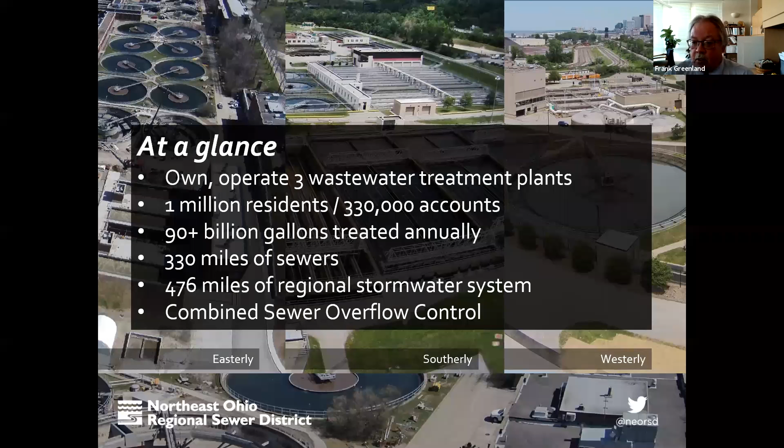So the 3 treatment plants, Easterly, Westerly, Southerly, they treat sewage from 1 million people, 24/7. We've got a certified lab that monitors those treatment plants for compliance with regulations. We pay for all of the delivery of sewage and treatment of sewage through sewer fees.

Project Clean Lake is a large $3 billion program. We're right smack in the middle of it. That program is to deal with overflows from what's called combined sewer systems. These are the oldest systems in Cleveland and the nation. They're called combined because wastewater and stormwater are in one pipe. They do overflow in big rain events. That's a problem, and we're dealing with it. Sewer fees are used to pay for that program.

The last program is our regional stormwater management program that really began in earnest in 2016, about 44 million annually, to deal with flooding, erosion, and water quality issues along some of the larger streams in our service area. We pay for that program. The revenue comes from an impervious surface fee.

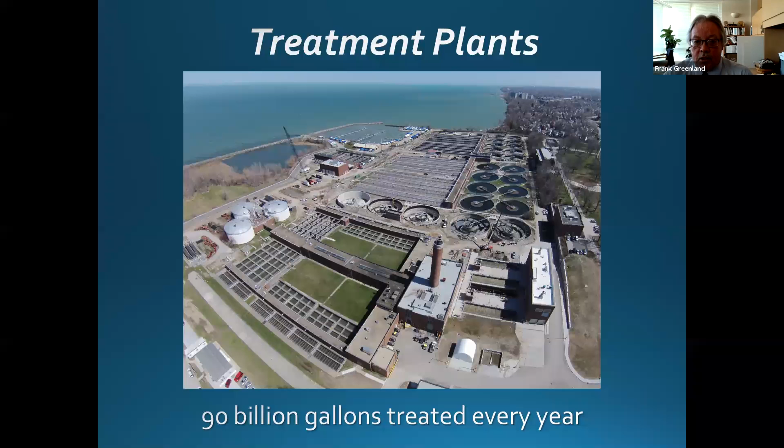So this is the shot of the Easterly treatment plant on the east side of Cleveland at East 140th. 90 billion gallons treated every year. So that is a lot of wastewater that goes through our plants. To put it in some perspective, 90 billion gallons of wastewater would fill FirstEnergy Stadium 113 times. And Southerly is one of the largest plants in the nation. 280 acres of land surface at Southerly. That's 212 football fields. So it's a very large facility.

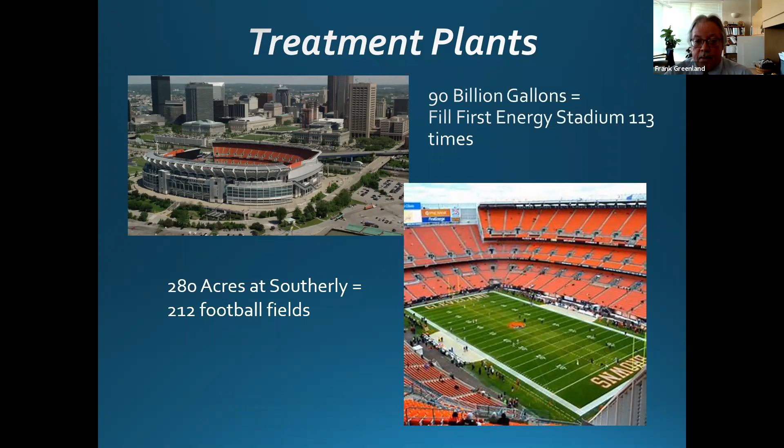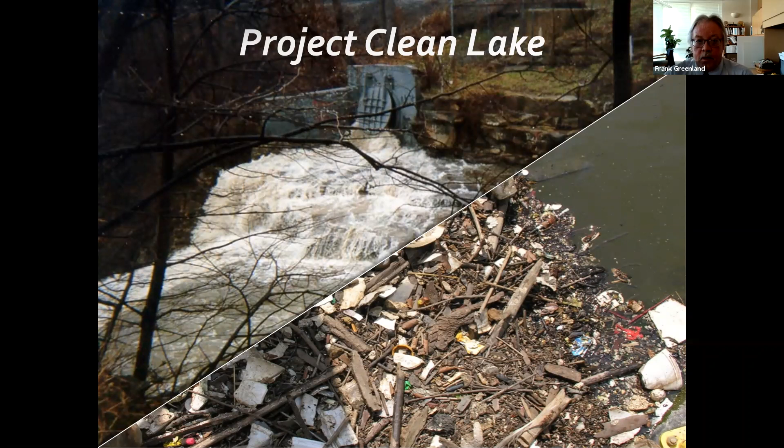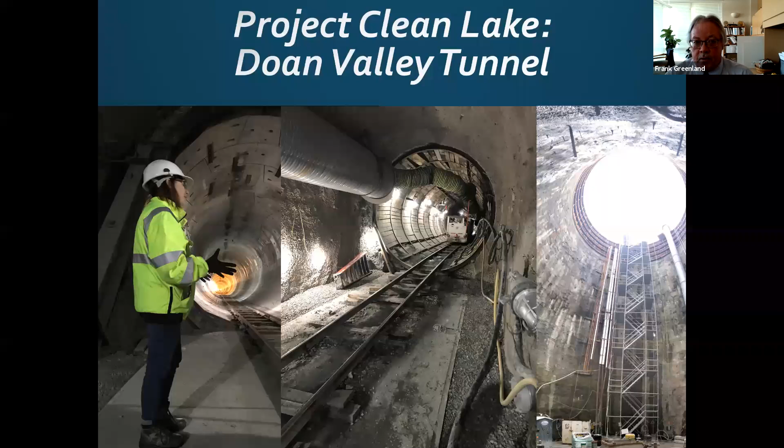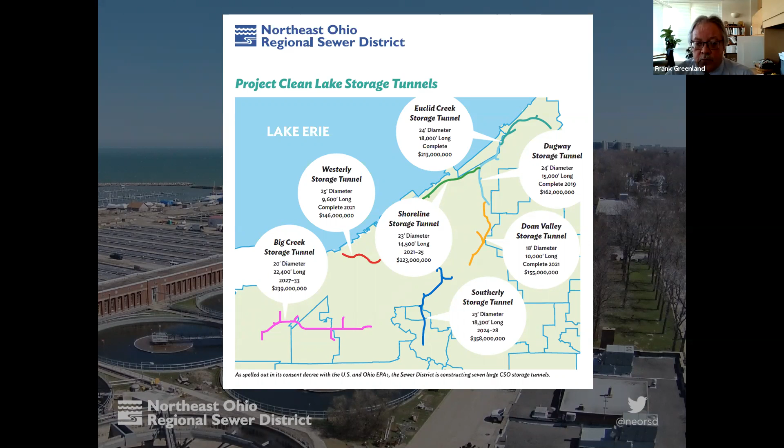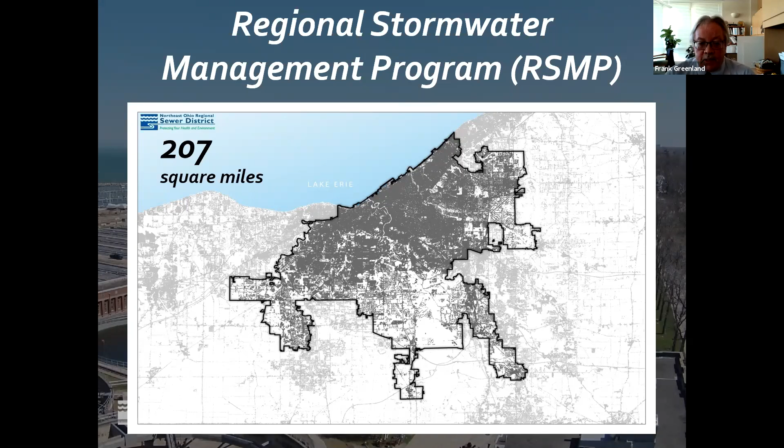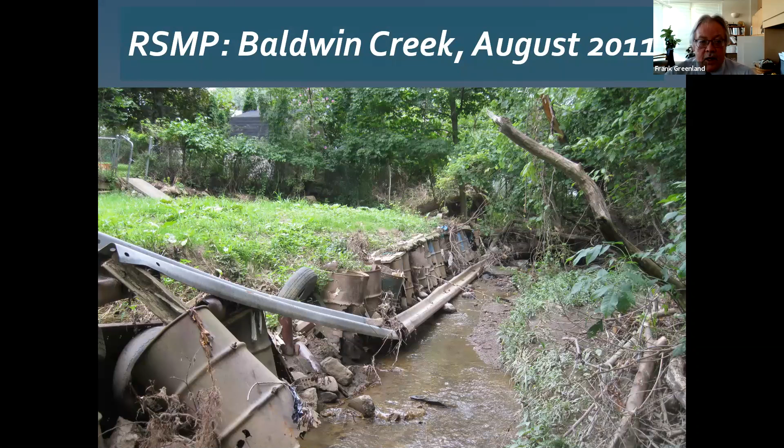So we've launched the program. We have inspection and maintenance activities and design and construction. This was a pretty acute problem on the towpath trail along the Cuyahoga River. It was encroaching and getting ready to take out the towpath trail and the Ohio and Erie Canal. So we got in there and arrested the erosion. This is a picture of the project just after completion. It's been reseeded, reforested. Things are looking great, and this project is really holding up well. So it's an example of the type of work we're going to do under this program.

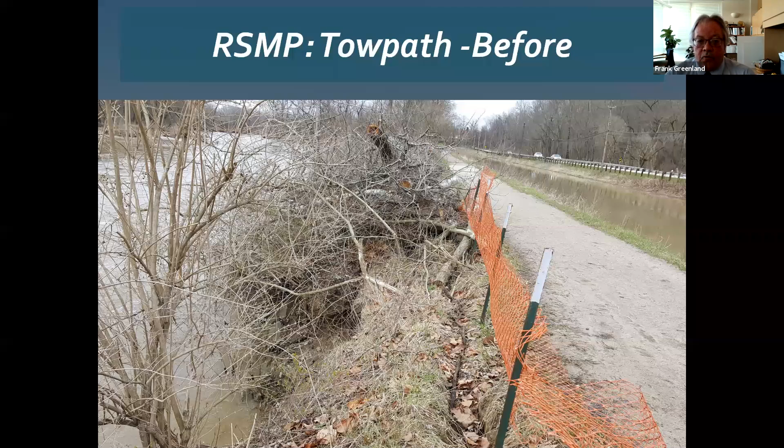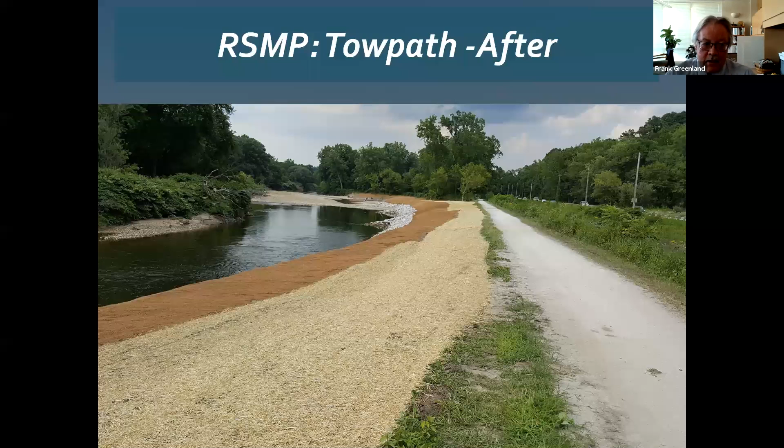I talked about maintenance. This is a before and after of a culvert. Culvert openings collect debris. Unchecked, this is going to cause flooding and erosion. So this is a before and after shot of one of the culverts in our system, where we inspect, find these types of things, and then write work orders and get contractors to take care of the situation.

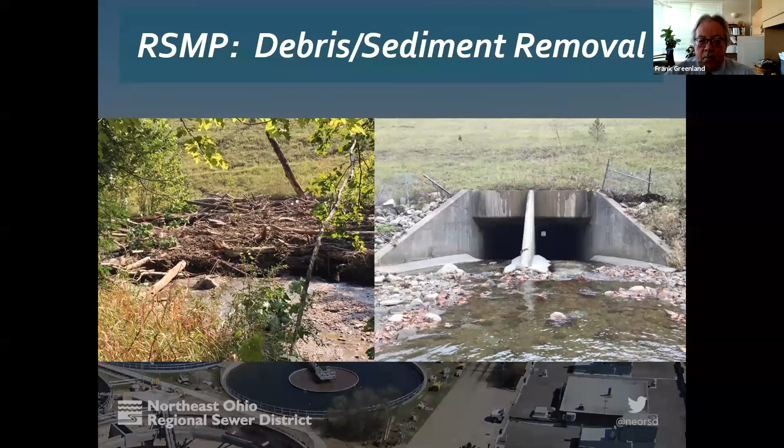So shifting to the industrial side of things, the district maintains a database of over 1,500 industrial customers. There's about 150 that are monitored much more rigidly for compliance with federal pretreatment regulations. We monitor all our industrial discharges for high strength characteristics on some time frame. And we monitor for BOD, TSS, and COD.

We establish industrial rates for high strength wastewater based on findings from the sewer district rate study. And this is an industry norm. The district has practiced this for some time, and our rate consultants will go over this in a little more detail. Certain industrial customers do have the option to pre-treat their wastewater to lower the strength of the wastewater to avoid the surcharge, or they can just pay the industrial surcharge.

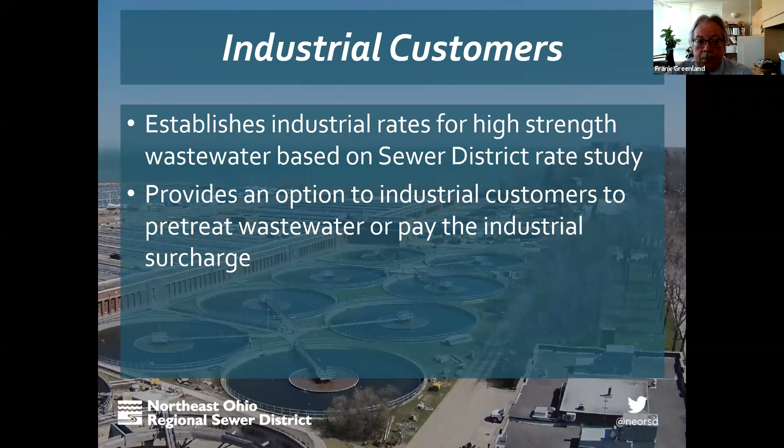So where we're at right now, we have just begun our rate study to establish the rates from 2022 through 2026. That study is currently in progress. We expect completion of the study by the spring or summer of 2021. Our Board of Trustees will need to authorize the new rates going forward.

There will be continued discussion, not only with our industrial customers, but all of our customers. And there'll be different vehicles going forward to continue to provide updates on where we're going with the 2022 through 2026 rates.

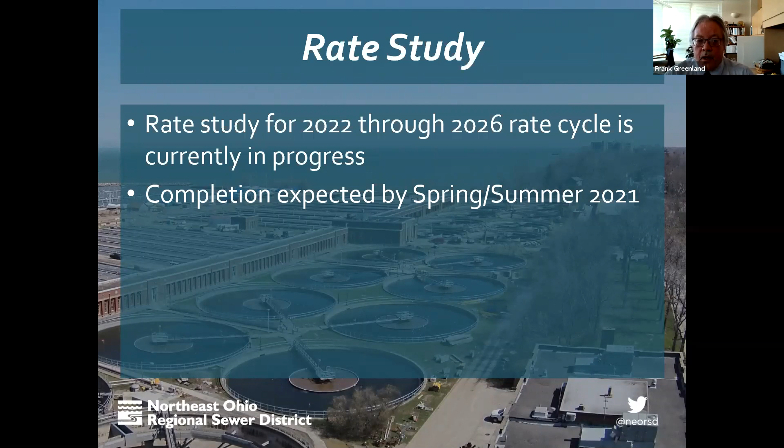But things are much better, and we're really proud of our contribution to the rebound of the Cuyahoga River. It's quite a national success story. In my mind, it took a lot of hard work, and it will continue to take a lot of hard work, but these are the types of things we're trying to contribute to in Northeast Ohio. So I think that's it for me.

John, are you going to facilitate questions? I don't know if anyone has any questions before we move towards our rate setting process. Thank you, Frank. There are 3 questions that we have received, so I'll pose them to this group. They may be for you or they may be for another member of the panel.

The first question came in, can you please provide a summary of the district's statutory or administrative requirements for customer review, for public review, and for comment on the schedule of fees starting in 2022? Is there a schedule or a footprint for that input in the rate setting process? Ask that again. Give me the front end of that again. Sure. The front end is asking, please provide a summary of the district's statutory or administrative requirements for customer review and comment on the schedule of fees starting in 2022.

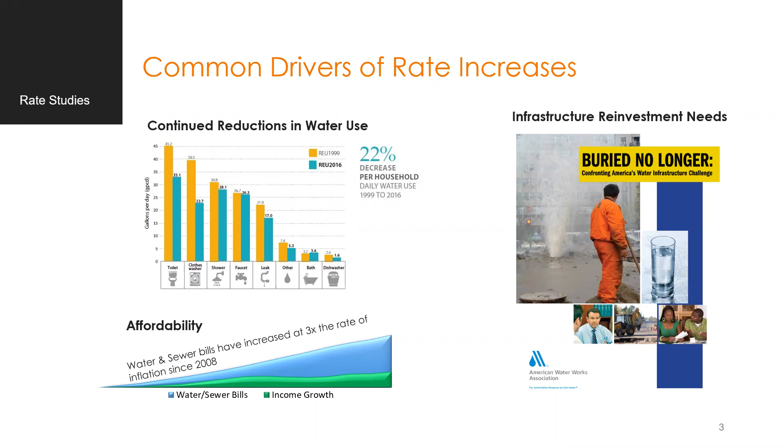And then finally, the illustration on the right is just one of many industry reports documenting and helping water, wastewater, stormwater utilities to come to grips with the massive investment that we've made as a region, as a country, as a city. All of the different utilities have made investments, and then we've got to take care of those assets so that they continue to be available. So we want to do that in a prudent way and not work towards failure and then emergency repairs. Just a good example of some of the kinds of challenging drivers that every utility has to confront.

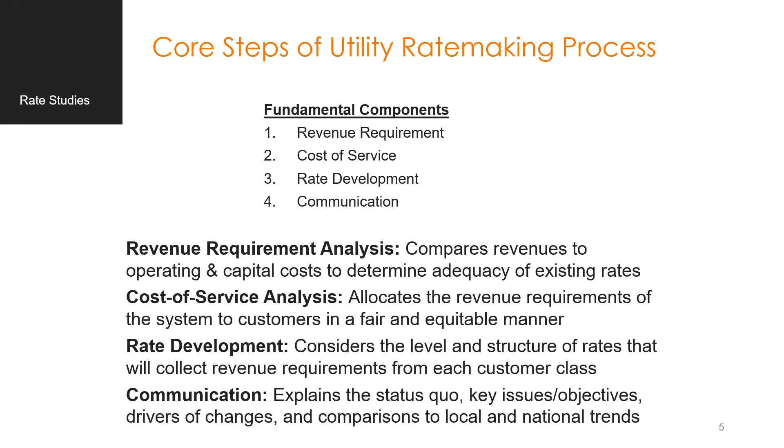Thank you, Bill. So we've outlined all of the basics of a rate study. And some of you may have participated in a rate study previously in one form or another. I'm going to walk through each of these elements in more detail. So the first step would be the financial planning step. And this is where we started the rate study a few weeks ago. We are looking at compiling the information on the district's operations and maintenance costs, O&M.

As you notice, we use a lot of acronyms, so you'll see a lot of abbreviations coming up. So O&M costs, annual debt service payments for previous investments in infrastructure, current and planned investments in capital improvements for infrastructure. Call that the capital improvement program. Financial policy. So these are the targets the district sets and must meet, typically to comply with bond covenants or its own internal goals and targets for financial management. And then finally, accounts and flows. So we're looking at all of this in total.

The financial plan that we prepare is actually a 10-year plan, even though the rate setting process is for 5 years. So from 2022 through 2026, we want to make sure that the district can balance and project its revenue required from all the rates that it collects over a 10-year period so that no surprises come up and that we can anticipate any changes in the future.

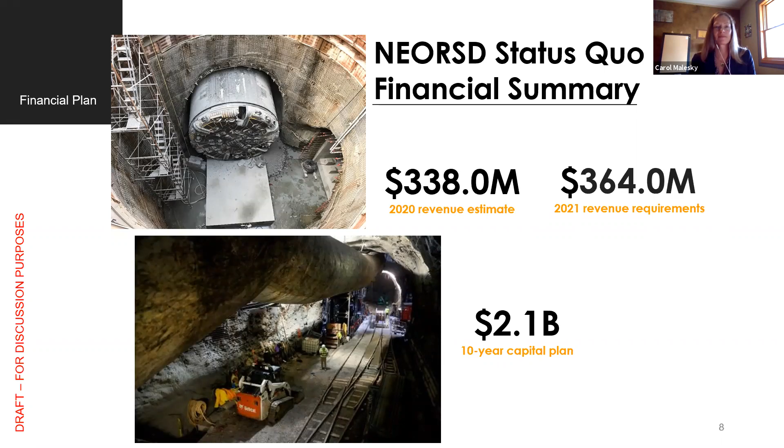When we look at an annual revenue required from rates, we can identify the groups of costs. So about a third of the costs are required for operations and maintenance, a third for debt service, and I'm rounding here, and a third for all the capital expenditures. So the district has to use that revenue collected from rates for O&M, debt service, and capital.

Once we establish how much is needed, that next step that Bill talked about is what we call the cost of service study. So the cost of service study's goal is to determine how much revenue is needed from each class of customers. We start with the revenue requirements of the system for that test year. We look at how costs are allocated and expended actually across the system. So this is something that we rely on the district's professional judgment, as well as the industry judgment for how a wastewater system works. We're going to talk a little bit more about that.

The customer characteristics step looks at all users in the system. We look at all flows and loading characteristics in order to determine how to recover the annual revenue requirements of the system through rates. And as I mentioned, those costs of service by class is the outcome of the cost of service analysis. I'm going to ask Bill to talk us through this graphic, and it's going to take a minute, but it walks us through this cost allocation process that I mentioned.

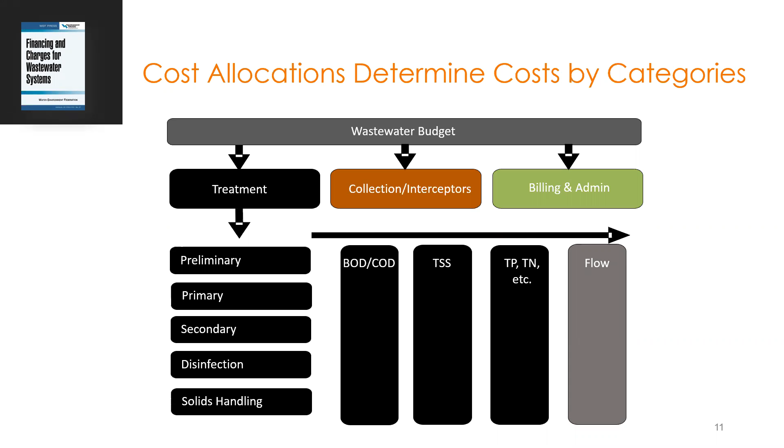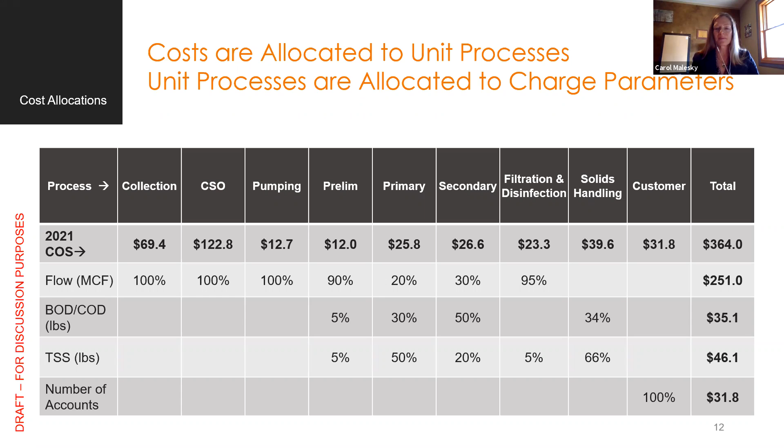Once we have that cost allocation process complete, we then move on to customer usage. Customer usage is really important because we look at all of the district's accounts, all billed flows and all loadings. It's not just a focus on one particular category. We have to look at it in total. The first thing that we do before we estimate what comes from customers is we look at the flows and loadings that are processed at the plants.

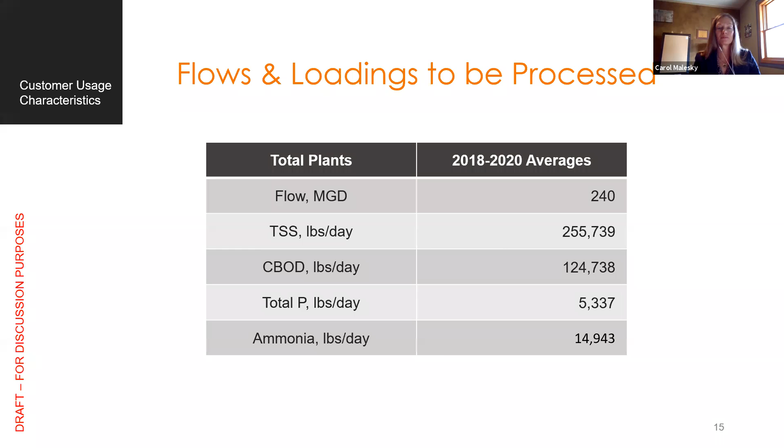We now know that we've got certain characteristics of wastewater flow. So now how do we move on to actually calculating rates? The rate development process looks at different components. And according to the wastewater industry, there are specific approaches that we can use to determine what these rates are. And all of the approaches are cost-based. They're cost-based and they're proportional. So there's some requirements we have to follow to make sure that the charges calculated are proportional to what is coming into the plant. The rates can be characterized by fixed charges, surcharges, and usage charges.

Here's another view of that. After we do our cost of service analysis, we have a cost basis for those rates and charges components. The district currently charges a fixed cost recovery fee, volume rates per MCF or per 1,000 cubic feet, and those industrial surcharges. The fixed cost recovery fee recovers billing and collection costs and a portion of administrative costs. So we know that the cost driver is the administrative costs component, and those costs then are recovered through a specific component of the district's rates and charges.

I'm going to skip over volume rates for a second, but in surcharges, we look at recovering the cost for treating wastewater that is higher than normal domestic strength. Most of you have probably read the district's titles, and the sewer rate code tells us that all customers pay a certain amount for normal domestic strength up to a limit. So anything greater than a limiting factor or limiting concentration is then assigned a surcharge. And that is because higher strength requires more cost to treat.

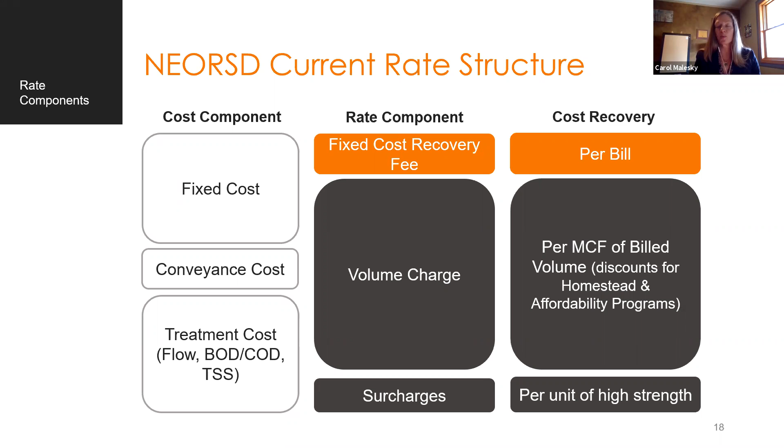And then finally, the surcharge component. That is the rate per unit of high strength. So it's milligrams per liter per MCF that is determined to pick up those extra strength, the greater than normal domestic strength costs.

This next chart shows the district's current rates and charges. And again, you can find this on the website or in the sewer code. For year 2020, which is hopefully over soon, we have shown the different rates by the different rate components I just described. So the monthly fixed cost recovery charge for a regular customer, that's one who does not qualify for an affordability program, is $7.95. It doesn't matter who you are, whether you're residential, commercial, industrial, you pay $7.95 a month.

Then you have the usage rates for the different service areas. So the City of Cleveland customers have one rate and the suburbs pay another rate. That is ending in 2022. So starting in 2022, there won't be a distinction between the two service areas. So we are just showing the current rates here for those two areas. So the usage rate per MCF for a regular customer in Cleveland is $100.15. And then the usage rate in the suburbs is $100.75. You'll see the 2021 rates are presented here also.

The industrial part of the code is a little more complicated because of the strength of waste that's involved. And we understand that not all industrial customers pay a surcharge. In fact, the rate formula for industrial usage coming into the plant accounts for normal strength. And if there's a higher strength load, then that is factored into the formula. So how do we do that? Well, we look at a base charge. The base charge plus the normal domestic strength waste is the same. It equals what all other customers pay.

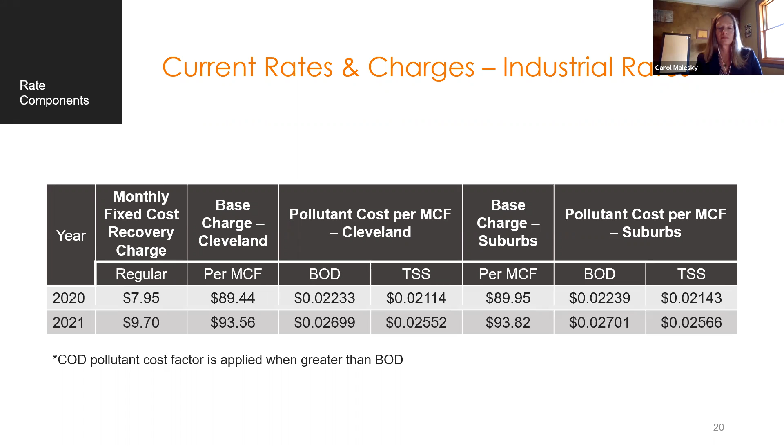We took a look at the revenue that the district collected in 2019 for all customers, just to get an idea of the proportion that's recovered from those different charges and charge components I've been talking about. By far, the greatest amount of revenue recovered is from that usage charge. So that $322 million comes from that rate per MCF. Fixed cost recovery charges are next at about 23.5 million. And then the surcharge revenue, so that higher than the limit amount that's charged, is about 4.5 million.

Let's focus a little bit on surcharges. When we are conducting this rate study, and this is not done, by the way, I'm going to remind you that we're still in the middle of it. We are attempting, and our task is to align the costs that the district incurs with the rates, and not just for surcharges, across the board. We're going to talk a little bit about that process and then go to a regional comparison. So the neighborhood, who's charging for industrial surcharges and what are they charging?

Our task, and you'll see this in the scope if you request it, our task is to look at not just the current industrial surcharges, but also look at other pollutants. This is part of the rate study. When we ask the question, which pollutants should a surcharge be applied to, we know that currently the BOD and TSS charges are assessed. We are also looking at nitrogen and ammonia and phosphorus. So we know that these are, at times, constituents that other utilities apply surcharges to.

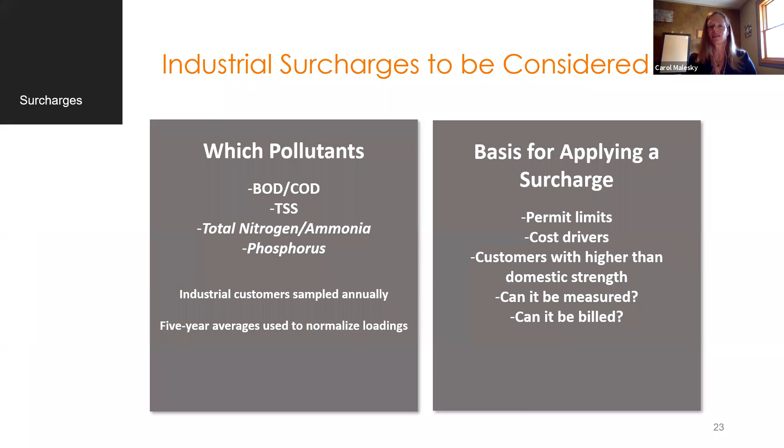And then finally, ammonia. We did the same calculation with the exception that there's a limit at one of the plants for ammonia, but we assumed that the limit for purposes of calculating extra loadings is 12 milligrams per liter. With that calculation, we estimated that 587 pounds per day would be higher strength, which is 4% of the amount coming into the plant. So you can see that the bulk of the extra loadings received at the treatment plants for the district is TSS and BOD, but a small component of the extra strength would be for phosphorus and ammonia.

In order to determine whether or not another charge parameter is warranted, we also wanted to see what your neighbors were doing. So we looked at the following utilities, and these limits are current for 2020. Northeast Ohio Regional Sewer District is at the top, and I mentioned the 228 milligrams per liter as the limit for that concentration for BOD. By the way, for COD, it works out to be 532 milligrams per liter, but for simplicity, I've just reported BOD. TSS is 266 milligrams per liter, and currently there's no nitrogen limit here.

For the Louisville Metropolitan Sewerage District in Kentucky, they show 250 milligrams per liter BOD and 270 for TSS. You'll notice that these limits are pretty close, and they reflect the individual characteristics of the utility.

So that's another thing to keep in mind, is that each utility, each community has unique characteristics and unique costs. So I'm just showing these for comparison purposes. The St. Louis MSD in Missouri has 300 milligrams per liter for both of its limits and no ammonia, no nitrogen. MSD of Cincinnati, MSDGC, is at 240 milligrams per liter for BOD and 300 for TSS. You can read the rest.

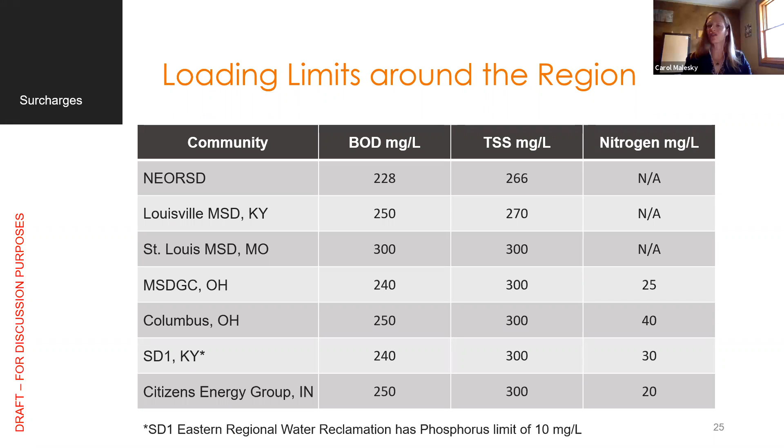And a subsequent question is noted. The BOD and TSS surcharges only occur when greater than the limit. So are the slides accurate as the charge is levied on less wastewater? I am not sure I understand that question. I apologize. Okay, and Lance, I see that question came from you, if you can follow up on that question, I will try to rephrase it. And Carol, if you can also see the chat, you may also get some clarification there.

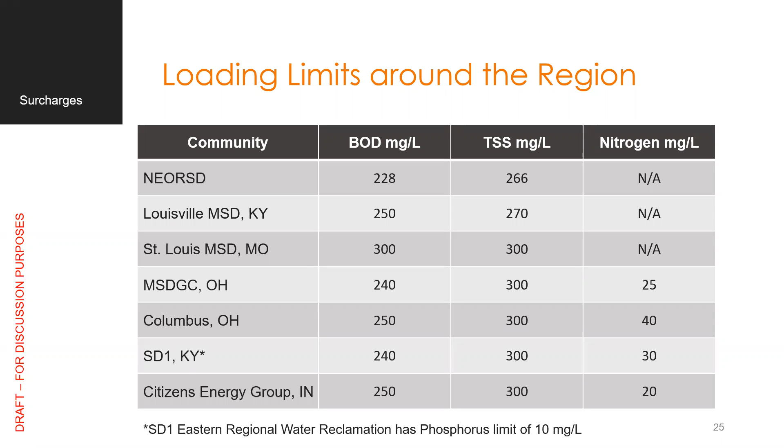I'm going to scroll back up to a question that began, I believe, during Bill's initial presentation. The question came in, is Stantec considering the large amounts of rationalization of costs that have been required to occur in lots of other industries across the country? And how is this being done? So can you speak at all about cost rationalization across the industries across the country? I'm afraid that may be another one where there may be a term of art that I'm just not familiar with. But maybe if we can get a little bit more explanation on what cost rationalization means, then we can respond. Very good. So we may also be able to get that. So there was the follow-up. Lance did follow up. Carol, if you can advance to the next slide, which refers to the unit cost.

Thank you. The data that I found was on each of the communities' websites and their rate schedules. So they are current as of today, so it's 2020. They report their surcharges. And I am assuming that they did a rate study as well to come up with those unit costs. And there's something I need to mention too, is that these unit rates that we calculate are

not just for extra strength. They're actually based on all flow coming into the plant, all milligrams per liter per MCF. It's not just the extra part, so that we take the total pounds of loading or total constituents coming into the plant divided by total costs allocated to that divided by the total amount coming into the plant.

So whatever flow changes occur, it's reflected in that concentration. So the milligrams per liter per MCF. So it gets reflected in the unit cost calculation. We have lower flows, you'll likely see higher unit rates. I'm not sure if that's where the question was headed. I think this might help.